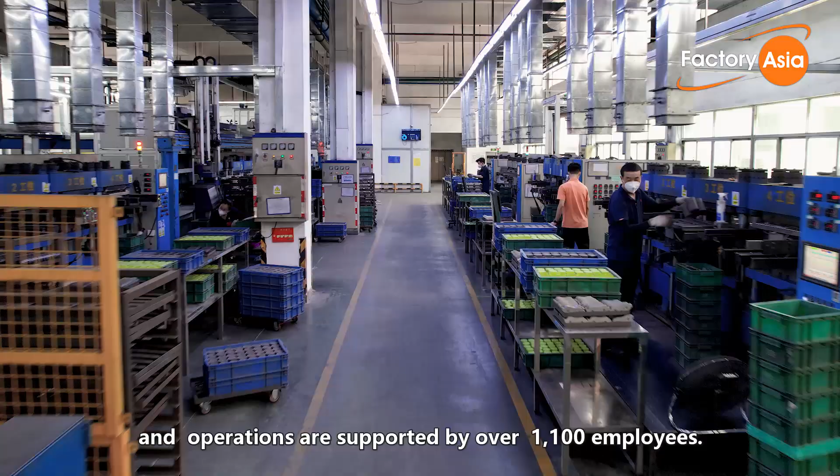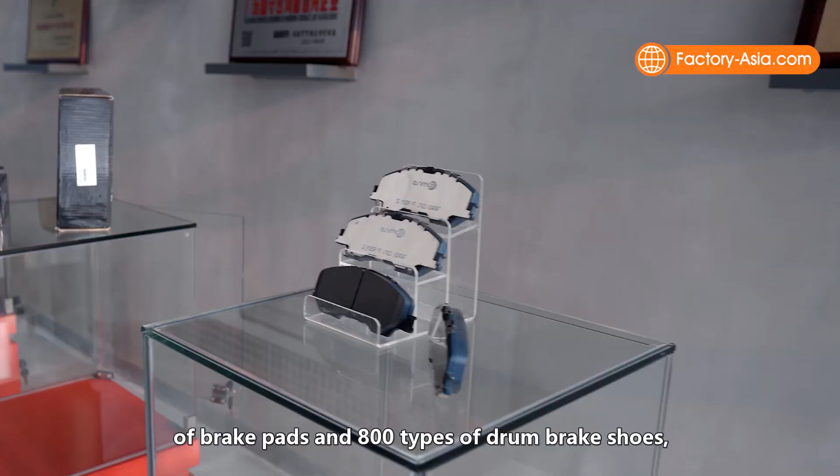ASIMCO is a leading automotive manufacturer with a factory in Zhuhai, Guangdong province. Their factory spans over 256,000 square meters, supported by over 1,100 employees, including 130 R&D engineers. ASIMCO is a globally renowned brand recognized in over 80 countries worldwide, with a product line covering over 3,000 types of brake pads and 800 types of drum brake shoes, covering most car series in Europe, the United States, Japan, Korea, and China, catering to different needs and preferences of car owners for capacity and performance.

ASIMCO's annual brake pad sales exceed $30 million, a testament to their focus on quality and reliability. Their brake pads have 6 key features that ensure superior performance and safety.

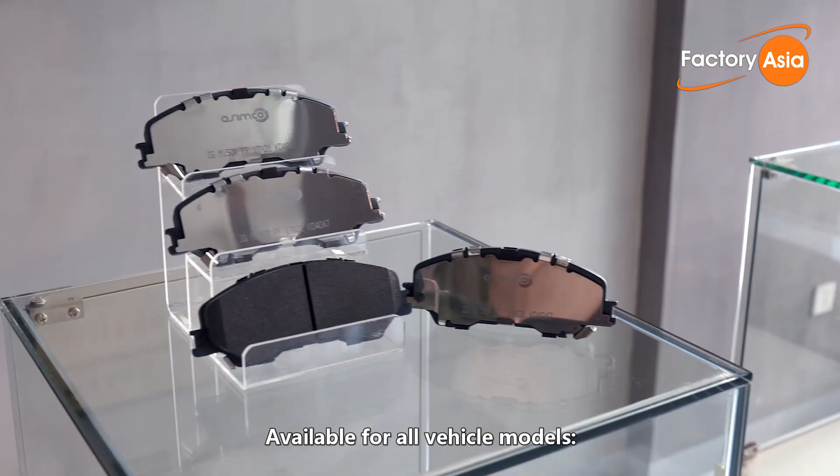Available for all vehicle models, covering over 95% of the existing range, their team rapidly develops new items to keep up with the changing market.

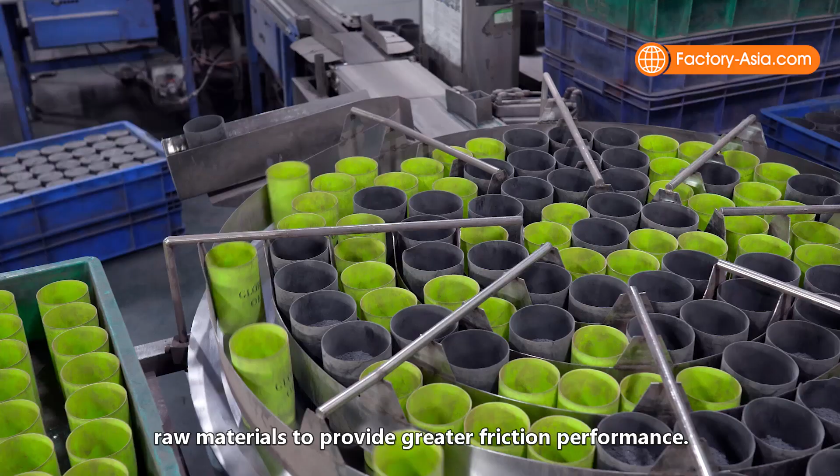Superior braking force: the manufacturer uses imported high-quality raw materials to provide greater friction performance. Individually customized noise reduction: their brake pads are customized to isolate vibrations and reduce noise during braking.

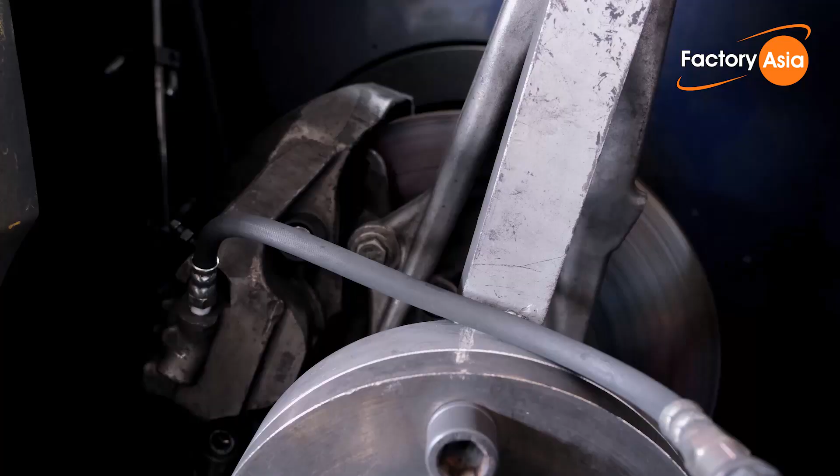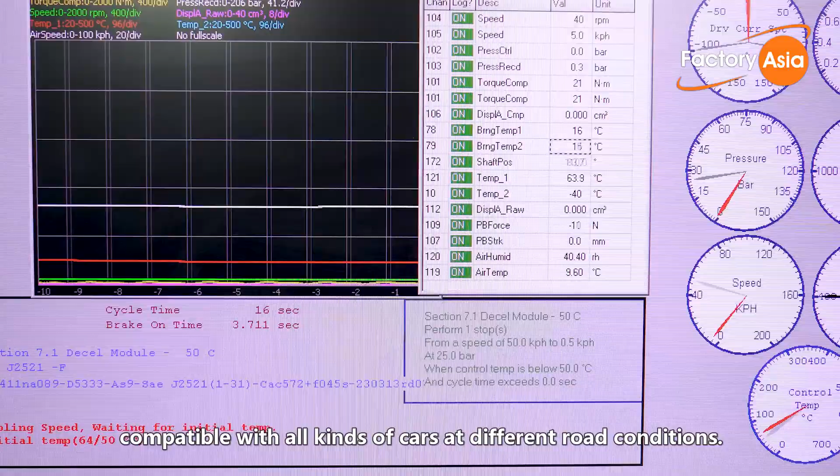Maximum protection: ASIMCO's brake pads maximize service life and help keep your vehicle running smoothly and safely. Comprehensive product range, compatible with all kinds of cars at different road conditions. Optimum performance: their brake pads provide superior stopping power and peak performance capabilities.

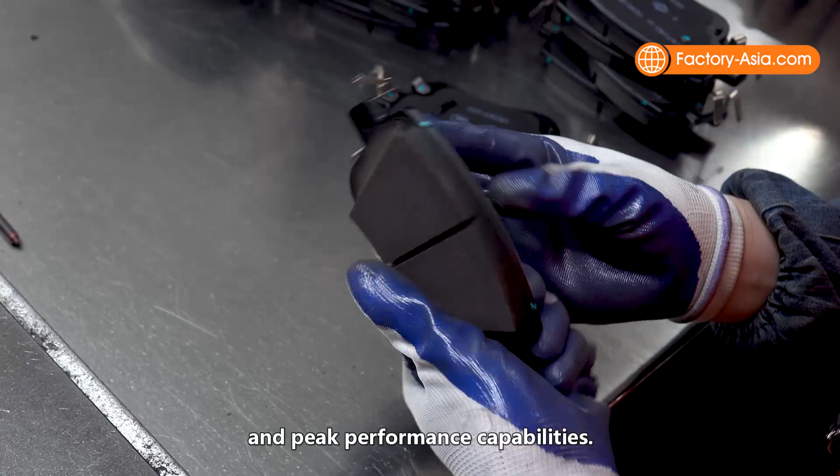Now it's time to visit their workshops and learn more about their manufacturing process and how they maintain consistent quality.

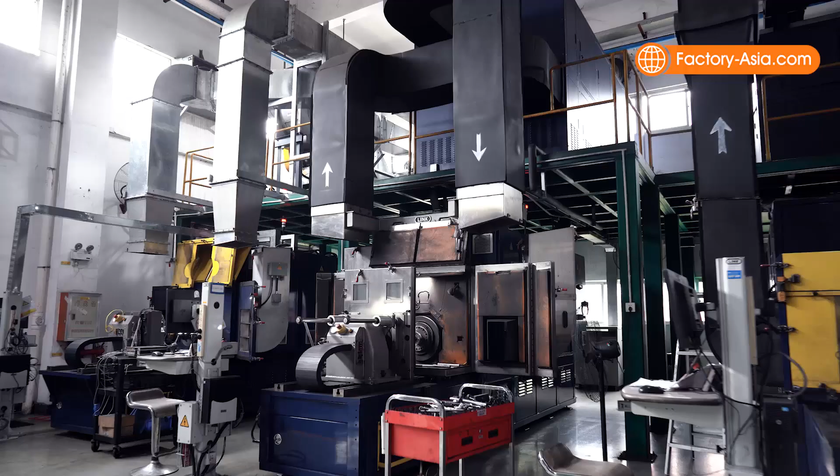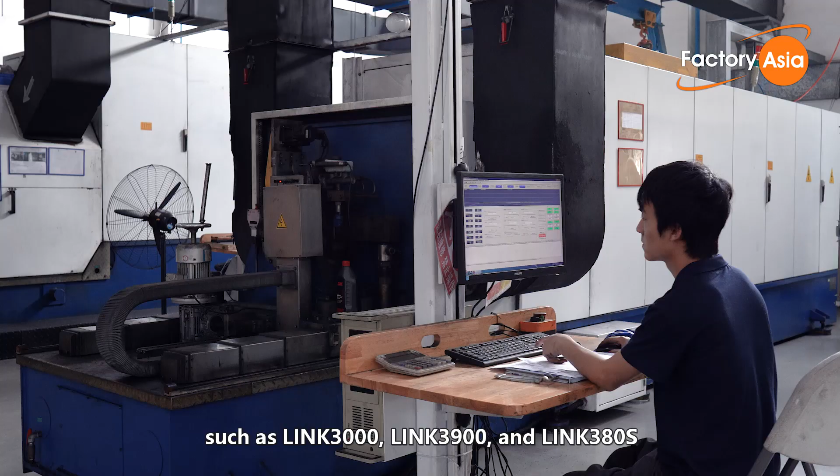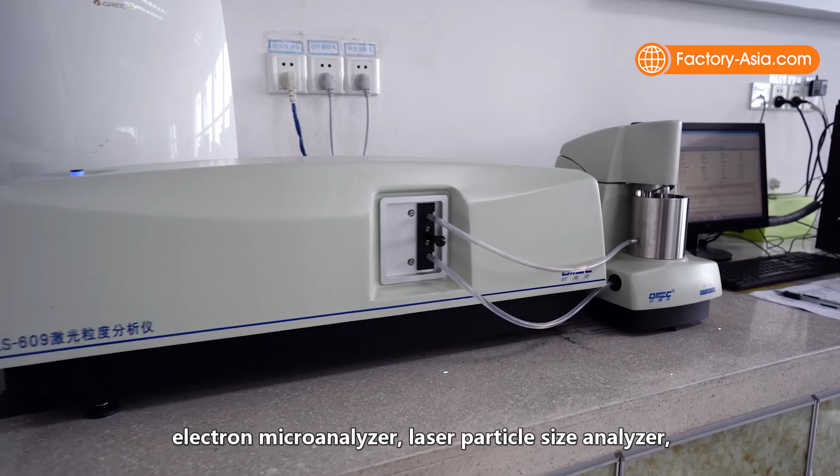ASIMCO's R&D department designs and creates prototypes to meet customer standards for durability and functionality. Their factory has a complete physical and chemical laboratory for materials, along with advanced testing equipment such as Link 3000, Link 3900, and Link 380S, and state-of-the-art raw material testing equipment, including thermogravimetric analyzer, electron microanalyzer, laser particle size analyzer, metallographic microscope, 10,000 times electron microscope, XRD spectrum analyzer, and Leica 3D microscope.

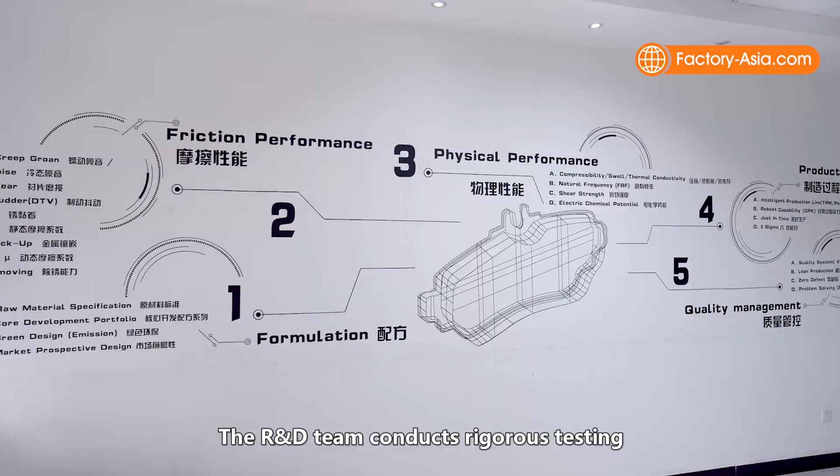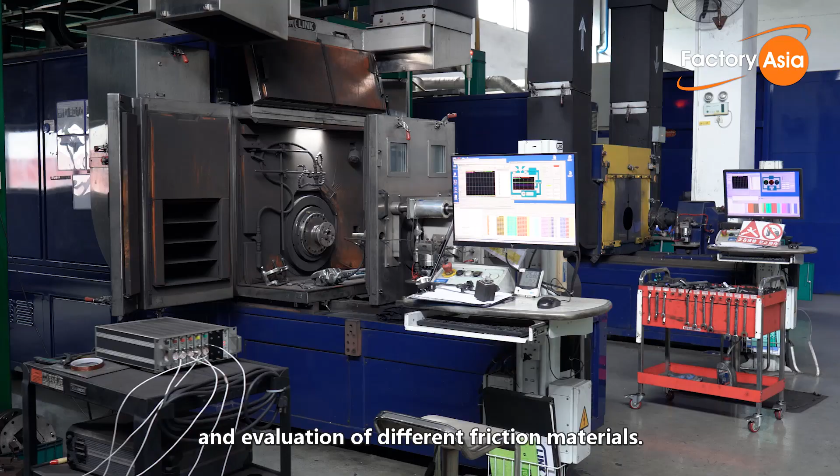The R&D team conducts rigorous testing of friction materials through bench tests and specific road tests, including the challenging terrain of Huangshan Mountain, to ensure comprehensive inspection and evaluation of different friction materials.

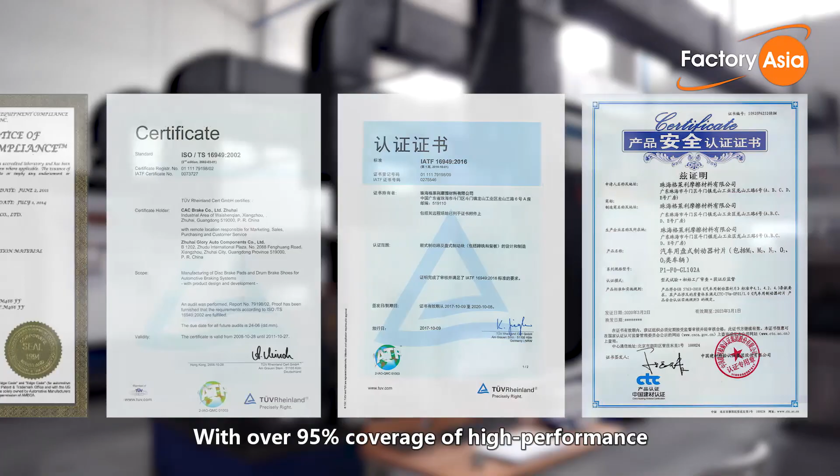ASIMCO's brake pads have received various certifications, including E-MARK, AMECA, NSF, and China CCC certification. With over 95% coverage of high-performance brake pads for market models, ASIMCO's independent research and development team delivers stable and reliable quality that is widely recognized in the international market.

Once the prototypes of brake pads are verified, they're put into production. As the first step, the R&D team conducts a rigorous screening process on the raw materials, carefully selecting key imported materials and relying on the industry's top 3 suppliers for conventional materials.

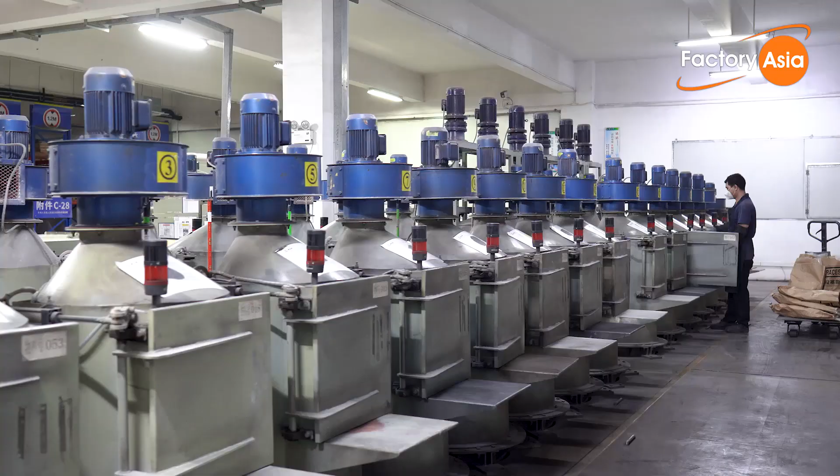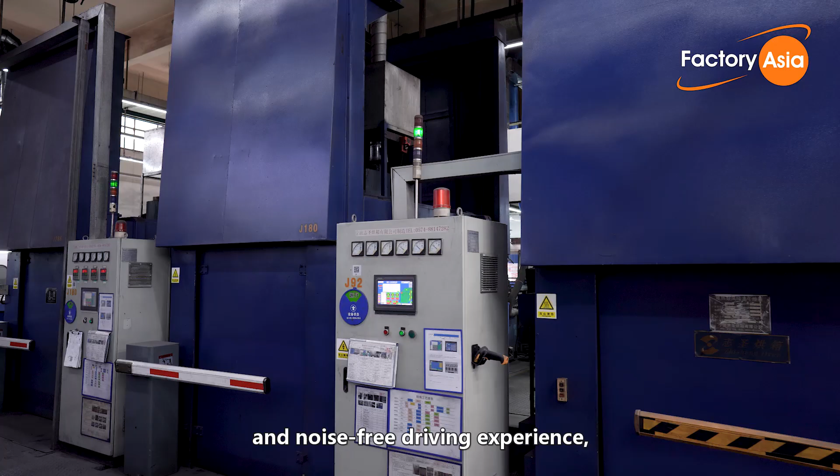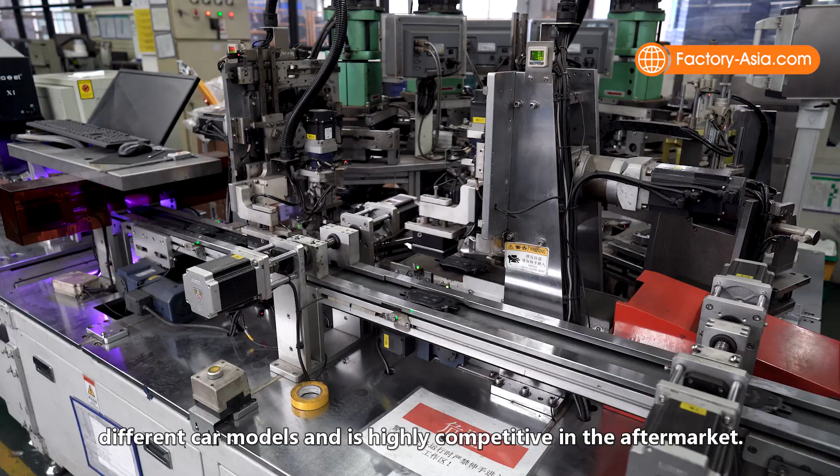ASIMCO applies its NAO ceramic formula, which is widely used in China, America, Europe, and Africa. It uses high-end ceramic to provide a comfortable and noise-free driving experience, making it a favorite among car owners. This formula is versatile enough to meet the needs of different car models and is highly competitive in the aftermarket. With its affordability and reliability, ASIMCO's NAO ceramic formula meets the company's high-quality standards while satisfying the needs of car owners.

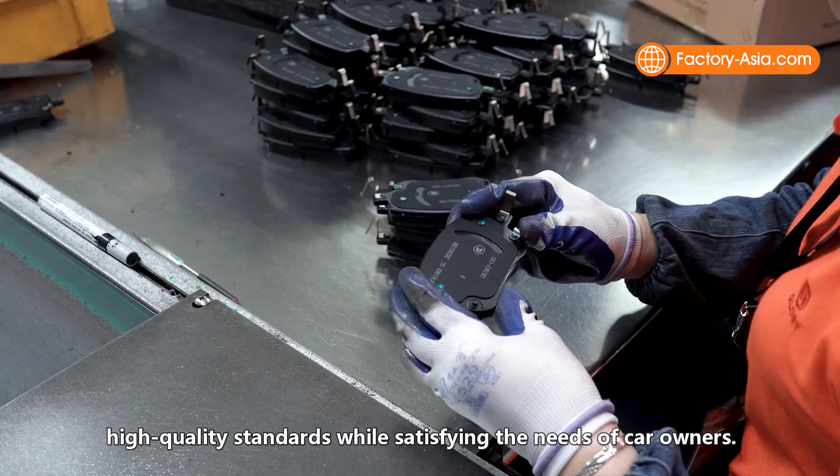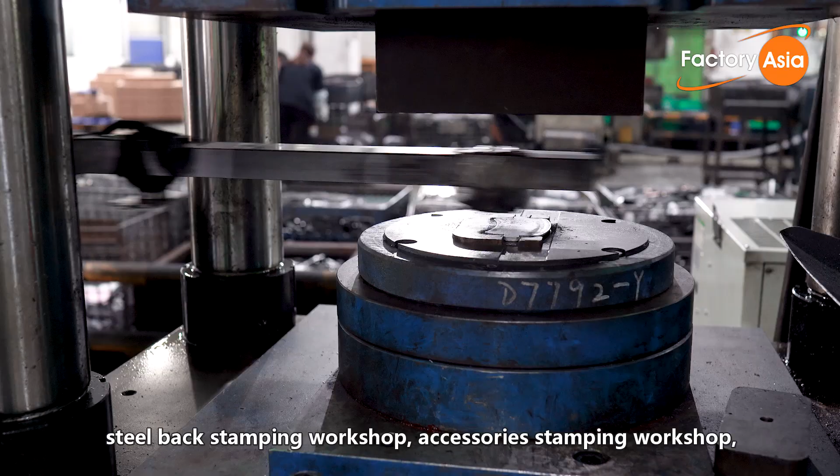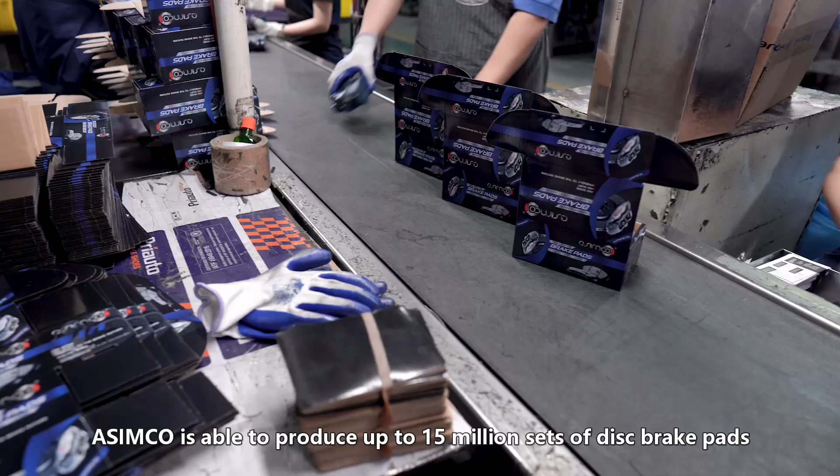ASIMCO's factory boasts an extensive manufacturing capacity, including a mold production workshop, steel back stamping workshop, accessory stamping workshop, and brake pad production workshop. With this full line of manufacturing capabilities, ASIMCO is able to produce up to 15 million sets of disc brake pads and 3.6 million sets of drum brake shoes annually, as well as over 100 million hardware accessories each year.

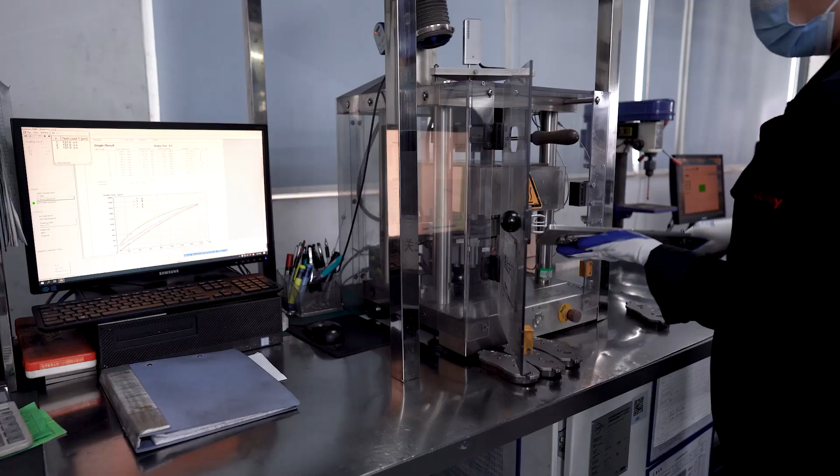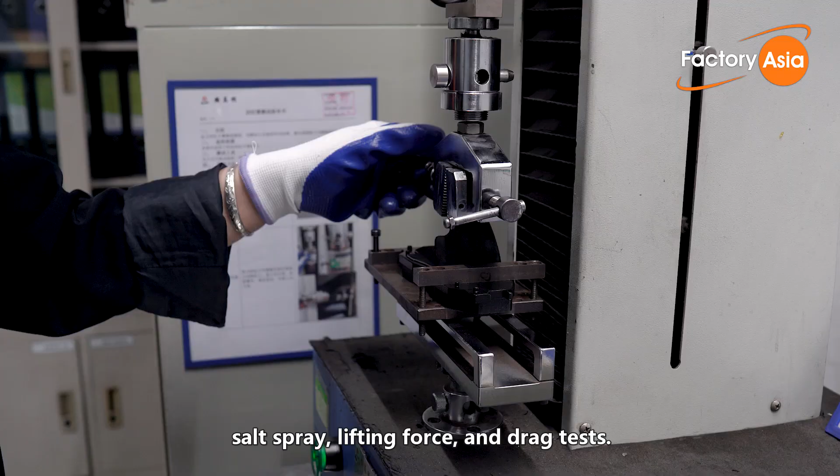To ensure quality control, all finished products undergo a thorough inspection prior to shipment. The samples are selected at random in accordance with the AQL and must successfully pass 8 rigorous tests, including compressibility, shear strength, dimensional accuracy, SAE J661 test, strength, salt spray, lifting force, and drag tests. These comprehensive tests ensure that the products meet the highest standards of performance and reliability before being shipped to customers all over the world.

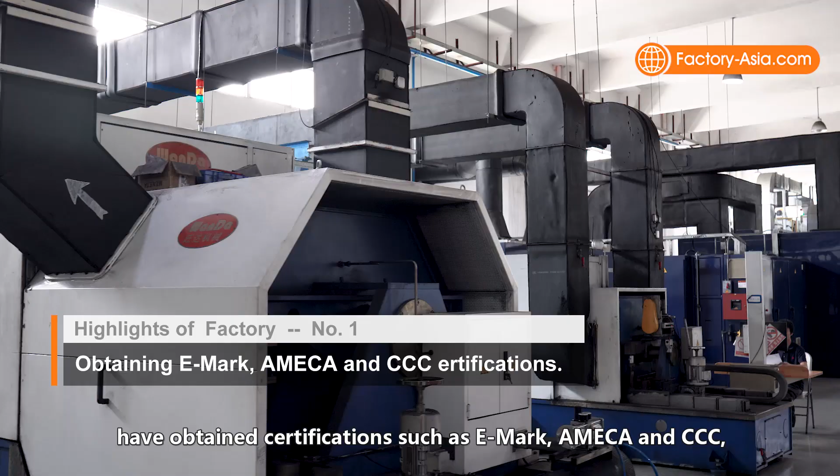As our tour of ASIMCO's production base comes to a close, we have identified several key strengths of the company. To begin with, ASIMCO brake pad products have obtained certifications such as E-Mark, AMECA, and CCC, which enable them to meet diverse requirements in different countries.

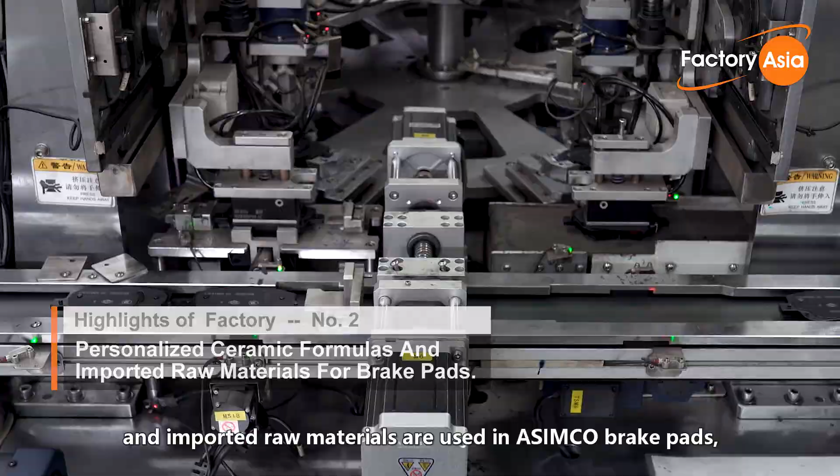Additionally, personalized ceramic formulas and imported raw materials are used in ASIMCO's brake pads, which cover over 95% of models. Lastly, ASIMCO has been a prominent player in the brake pad industry for over 2 decades, with its brand being recognized in over 80 countries, making it a clear and palpable advantage.

To conclude our review, we rate ASIMCO 5 stars out of 5 for their strong performance.